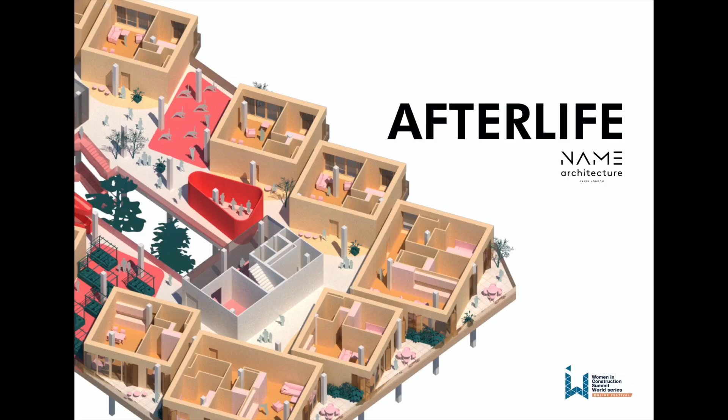Afterlife is a design concept that proposes to retain rather than demolish existing structures and retrofit them to achieve enhanced environmental and social facilities. According to statistics, the average lifespan of a building in Britain is 132 years. However, in the commercial sector, the average lifespan is only 25 to 30 years.

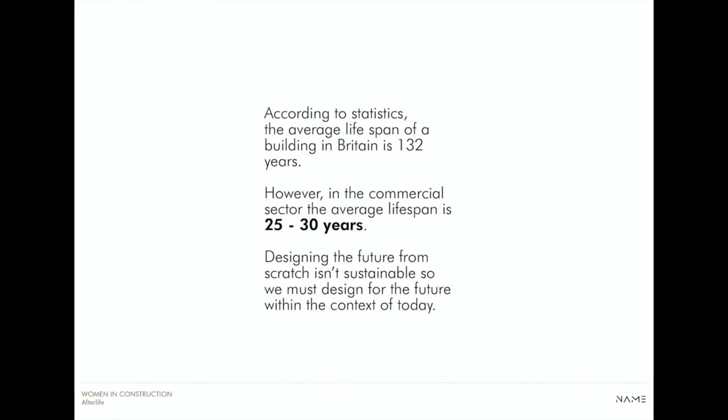So designing the future from scratch isn't really sustainable. We must design for the future within the context of today. And as we know today, the greenest building is the one that already exists. But this is not yet a standard in our industry.

The UK construction and demolition sector currently produces 120 million tons of waste each year. This is nearly 60% of all UK waste. On average, 95% of this can be recycled, and we know that reuse of materials lowers carbon emissions and utilizes their functionality. The photo on this slide is quite emblematic.

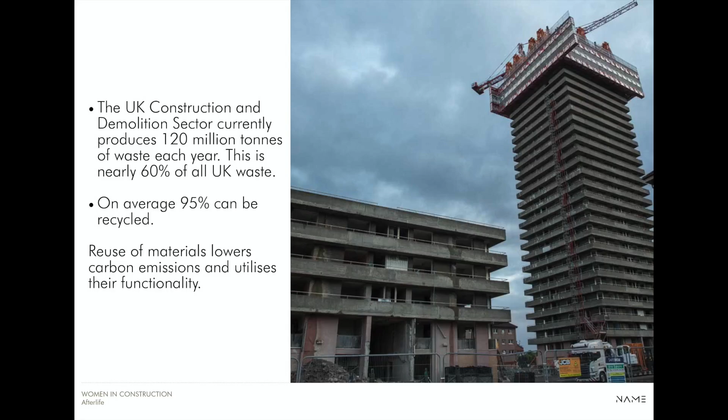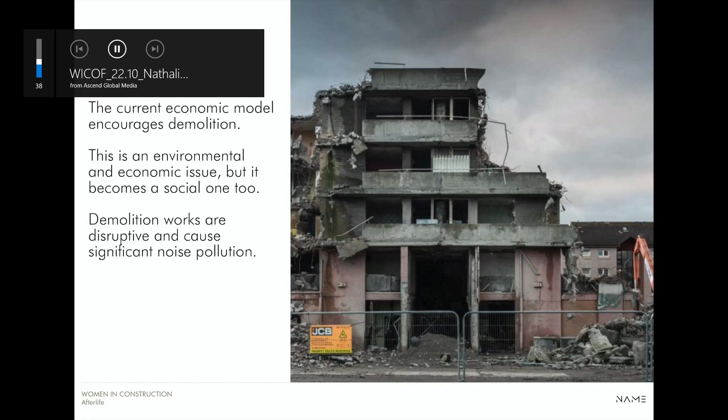On the left, a building being demolished, while on the right, a new structure is coming up. The current economic model actually encourages demolition. This is an environmental and economic issue, but it becomes a social one too. Demolition works are disruptive and cause significant noise and pollution. Here on this slide, we see the building from the previous image, which was now demolished.

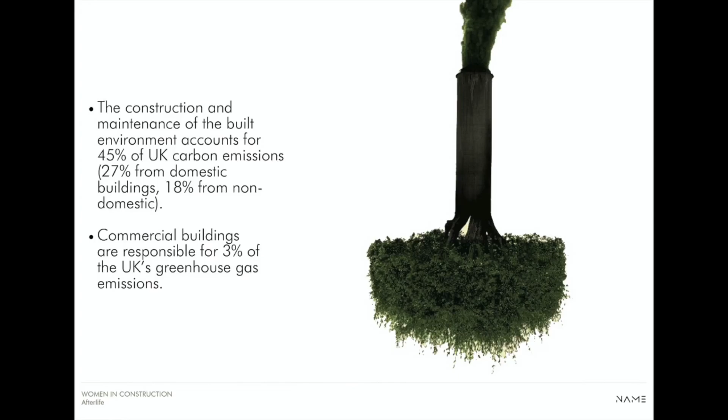So what about our existing built environment? The construction and maintenance of the built environment accounts for about 45% of UK carbon emissions, and commercial buildings are responsible for 3% of the UK's greenhouse gas emissions.

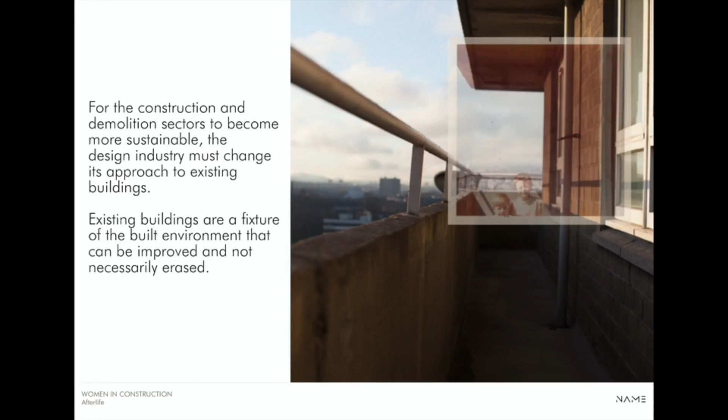For the construction and demolition sectors to become more sustainable, the design industry must change its approach to existing buildings. Existing buildings are a fixture of the built environment that can be improved and not necessarily erased. As we have long experienced in our practice, the purpose of a building can be altered, and the environmental performance of a building can be improved.

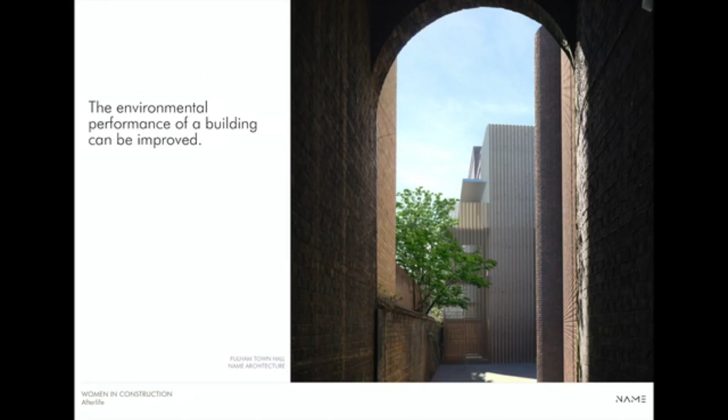So we ask a question: how much demolition could be avoided with a thoughtful architectural strategy? How can retrofitting become more of the norm?

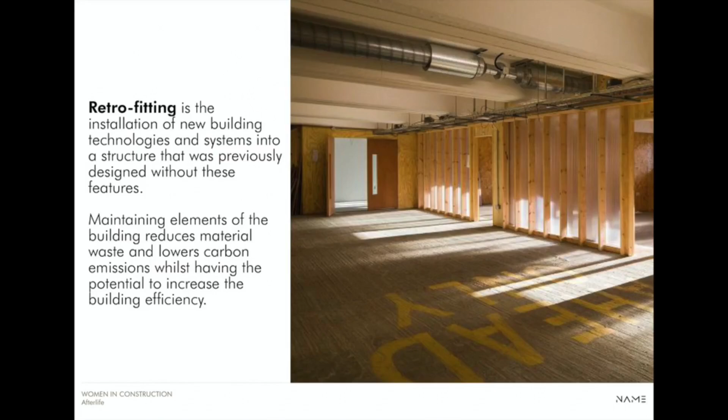The notion of retrofitting is not a new one. It considers the installation of new building technologies and systems into a structure that was previously designed without these features. Maintaining elements of the building reduces material waste and lowers carbon emissions, whilst having the potential to increase the building efficiency. However, this is still carried out in rather established construction methods today.

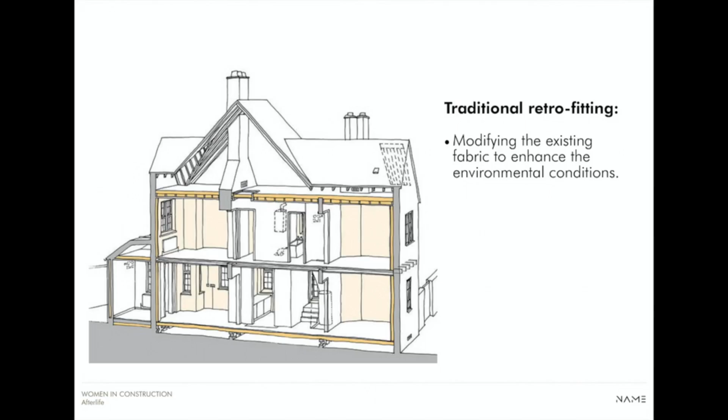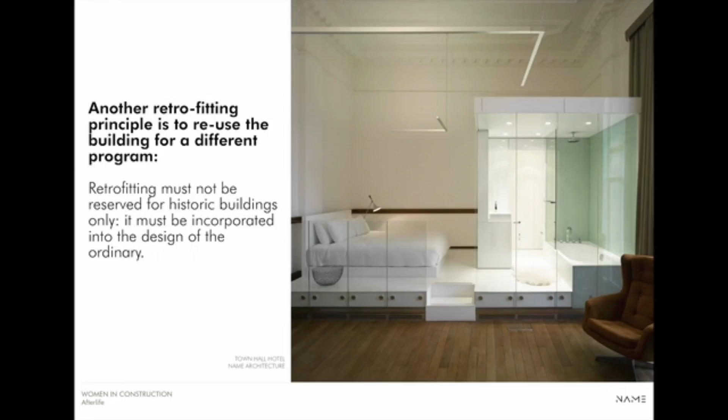Another aspect of traditional retrofitting is to modify the existing fabric to enhance the environmental conditions, mainly by adding insulation internally. A further retrofit principle is to reuse the building for a different program. Converting listed buildings is something we deal with a lot in our practice. However, retrofitting must not be reserved for historic buildings only. It must be incorporated into the design of the ordinary.

What we are proposing here is a novel way to consider retrofitting, by harnessing the interstitial space, in other words, the leftover space. Stemming from the observation that typical dimensions, for example floor-to-ceiling heights, of commercial buildings compared to those of residential buildings result in a surplus for the latter, we examined whether this surplus space could be used to enhance environmental and living conditions.

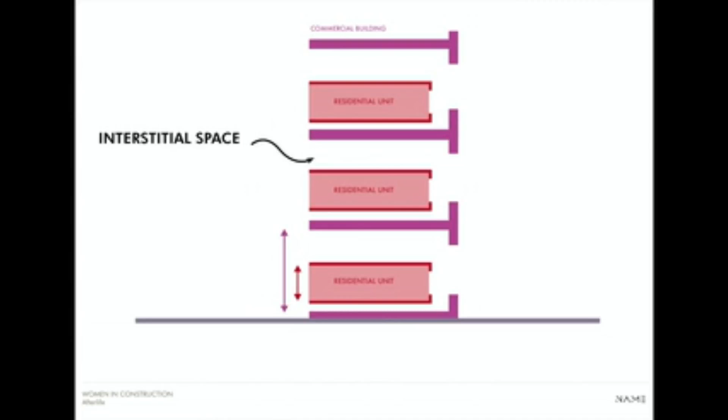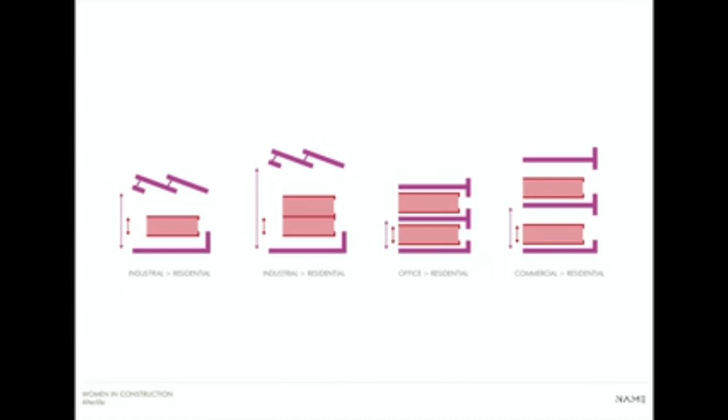Residential floor-to-floor story heights are typically lower than those of non-residential uses. Can we thus use this interstitial space surplus to improve environmental conditions within existing structures retrofitted for residential use, and enhance the quality of living?

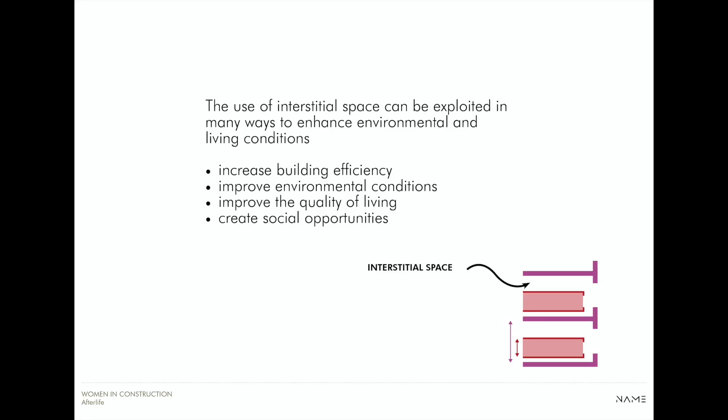This was the foundation of our thoughts and the outset of our design proposal, which concentrates on the potential of existing buildings to be reused. The use of interstitial space can be exploited in many ways to enhance environmental and living conditions. It can increase building efficiency, improve environmental conditions, improve the quality of living, and create social opportunities.

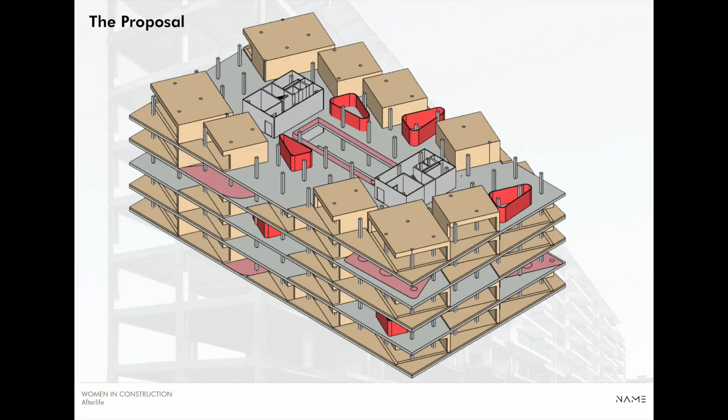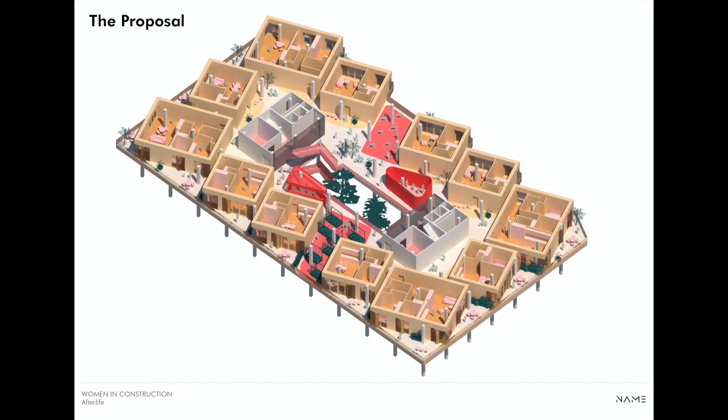Afterlife is a design concept that works with existing structures and retrofits them for new, greener uses with prefabricated dwelling units and communal amenities. We propose to design housing units to inhabit the periphery of the slab, with the core area dedicated to adaptable communal amenities around a central atrium.

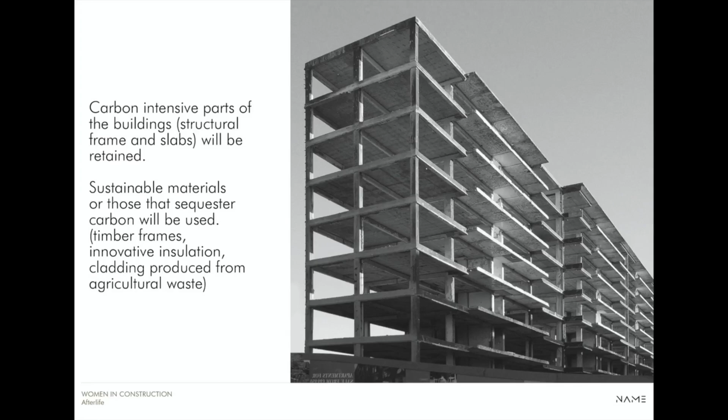The carbon-intensive parts of the building, the structural frame and slabs, will be retained. Sustainable materials will be used for the new insertions: timber frames or innovative insulation and cladding produced from agricultural waste.

So how do we do this? First, we strip out the existing building back to its structure. We keep the core and create a central atrium to vertically and visually connect communities. We also update circulation cores to ensure they meet current regulations.

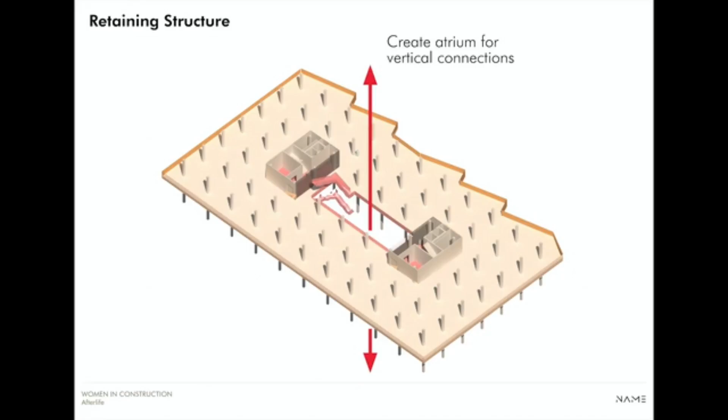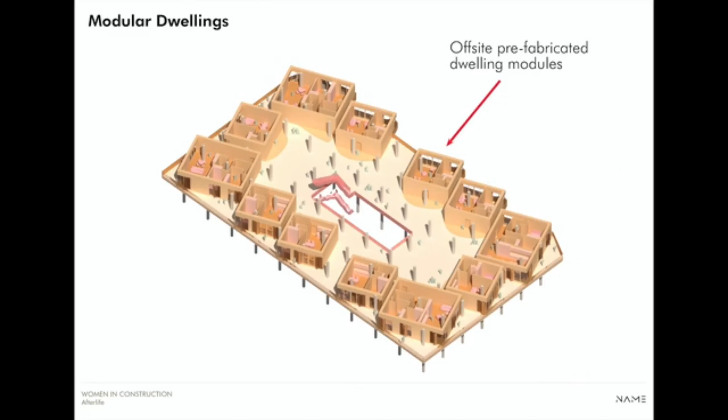We then analyze the building's orientation and prevailing wind conditions, and the off-site prefabricated dwelling modules are placed on the slab around its periphery accordingly. We exploit the surplus space to rotate dwelling units into the most favorable orientation.

We strongly believe that three key features embody the basics of good quality housing. First of all, dual light exposure, to ensure a quality of natural daylight throughout various moments of the day and an outlook on a variety of exteriors with enhanced views.

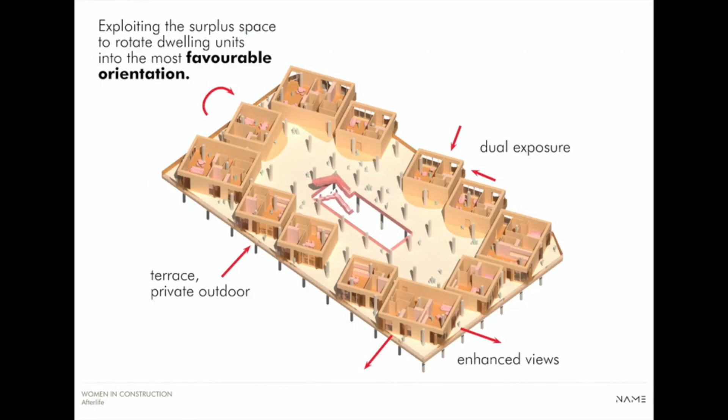Second, private outdoor space, and the provision of a balcony to enable access to outdoor space. And third, natural cross-ventilation, to provide healthy airing of the internal spaces and assist cooling.

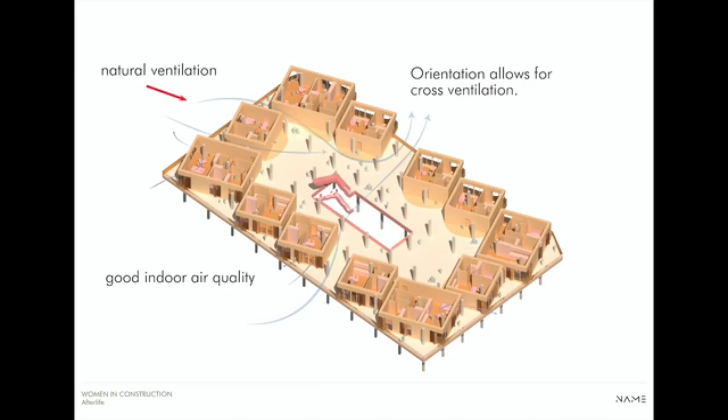The orientation and spacing of the units allows for cross-ventilation and good air quality throughout the slab, both for private indoor spaces as well as for the external communal facilities.

The interstitial space is also used to integrate smart living features to enhance energy-efficient consumption and comfort control. Insulation is inserted in the gaps between the existing structure and the new inserted units, and more generally, utility rooms are located in the surplus space between dwelling units.

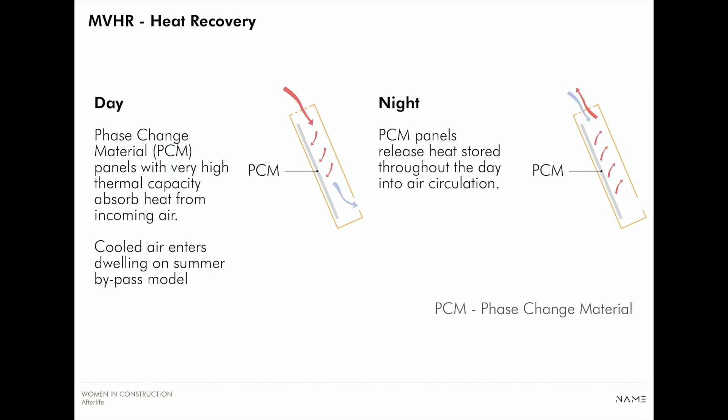One example is the insertion of heat recovery units between modules. We insert phase-changing systems in the interstitial space, allowing for panels with very high thermal capacity to absorb heat from incoming air, and as such, have cooled air entering dwellings in summer. PCM panels then release heat stored throughout the day into air circulation at night.

Another smart living feature is the communal air source heat pump system, which is used for communal heating and water throughout the slab, as well as extensive PVs on the roof level. Throughout the scheme, we aim for passive house standards of the building fabric and the use of biomaterials for health and well-being.

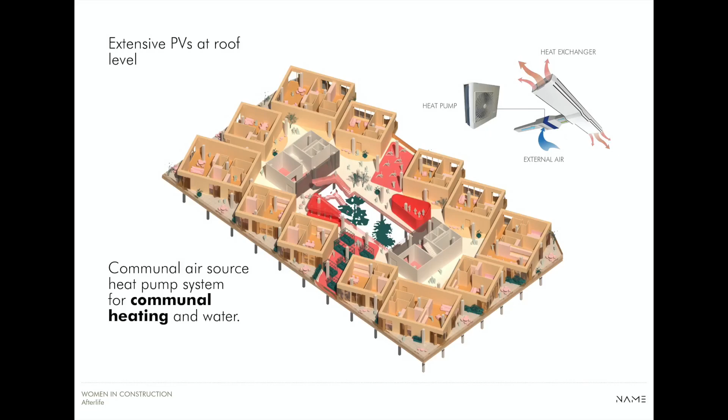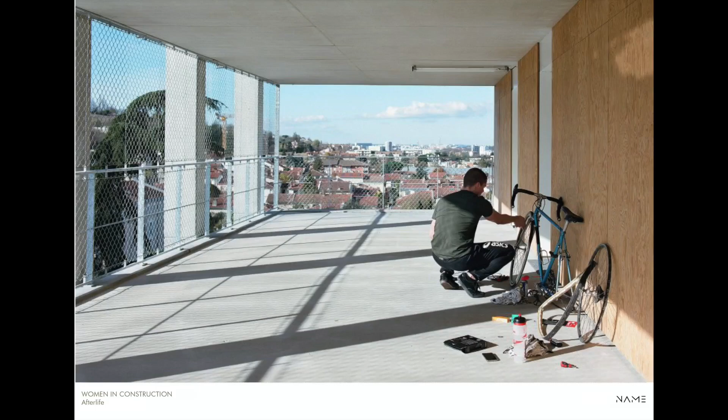The exterior private space created through the rotation of each unit provides a generous, well-designed private outdoor space, as well as shading for the balconies on the south and west facades, thus avoiding overheating risk. This is an example of what a private outdoor area at a taller vantage point over the city could provide.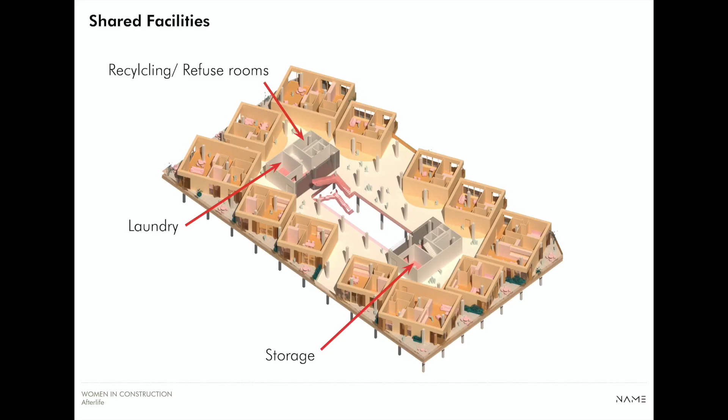The original cores of the building are then reconfigured into shared facilities. These become refuse and recycling rooms, or communal laundry spaces, storage rooms, basically facilities that benefit everyone and enable more space to be dedicated to the dwelling units.

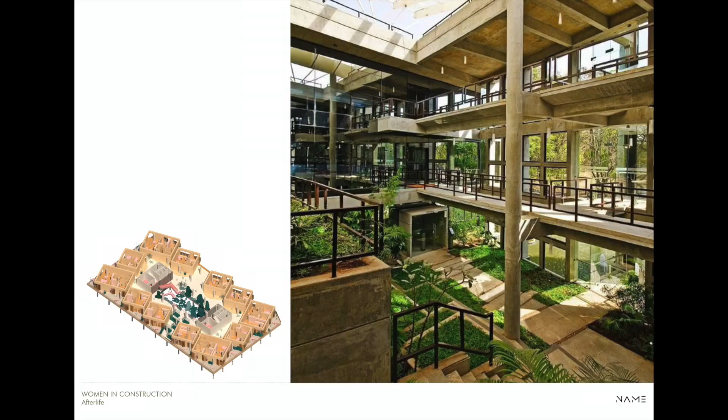Vegetation is generously inserted through an approach to biophilic design. We have communal landscape planting and gardens that provide food growing opportunities. Greenery on all floors is visible through the atrium and contributes to providing a quality of space.

The core area around the central atrium is dedicated to adaptable communal amenities. These provide shared facilities and enhance social connections. They offer a variety of amenities, both indoor and outdoor, that residents will benefit from.

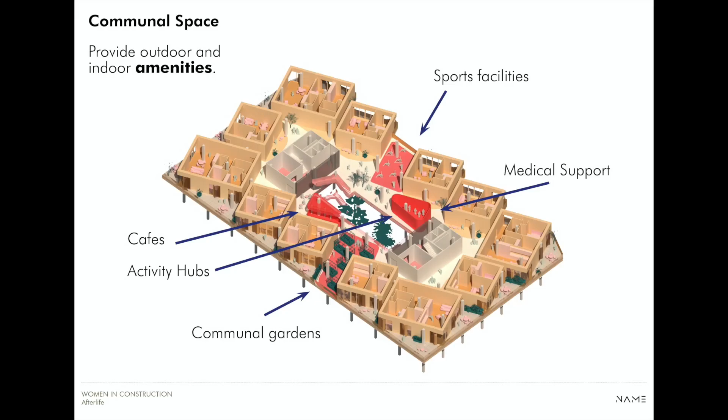The communal amenities are devised as flexible spaces, which can be accommodated at different locations on the various floors to offer a wide variety of uses for the community. These could range from wellness, such as fitness rooms, clinics, beauty salons, or a medical support unit, for example, for elderly living. There will also be living amenities such as cafe, communal lounge, or game rooms, or learning amenities for art activities and workshops.

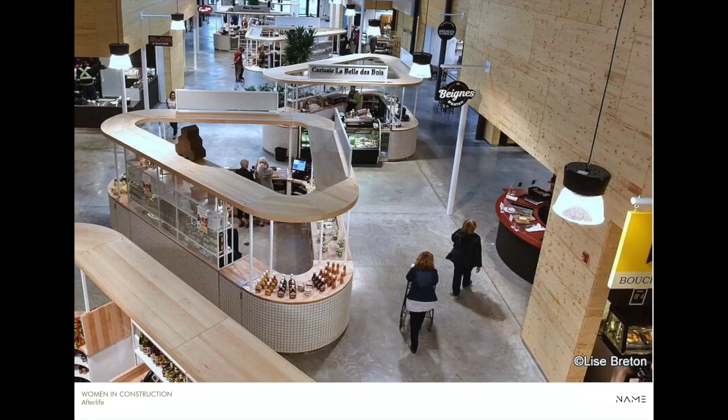The residents will thus benefit from a sense of place and community in the building. We also provide an outdoor open space for playgrounds or sport activities, for example. All these social pods are modular and designed to adapt to a multitude of activities and sizes. The communal areas are a space for encounter and exchange for an active lifestyle.

Beyond purely environmental aspects, this is also a way for us to use this interstitial space for better living conditions. Our thinking to create a more sustainable product also considers the technologies required to achieve this.

The proposal is put together with alternative construction methods and prefabrication. This allows for time and cost efficiency, an increase in quality as each component is created in a controlled environment, and the site is kept clean and organized, thus reducing waste.

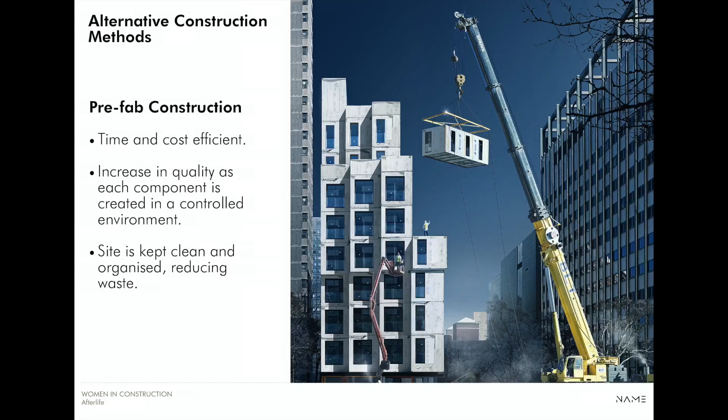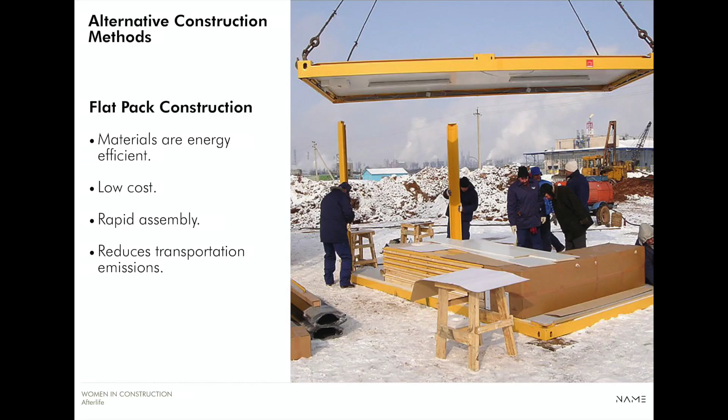The modular units arrive as flat pack elements. They are assembled with materials that are energy efficient at a low cost thanks to rapid assembly. And it also reduces transportation emissions, further improving the sustainable outcome.

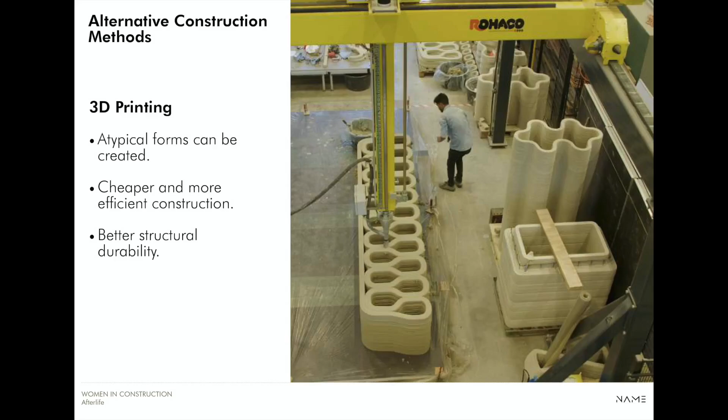In the future, we could also consider on-site 3D printing for creating atypical forms, or possibly a cheaper and more efficient construction and better structural durability.

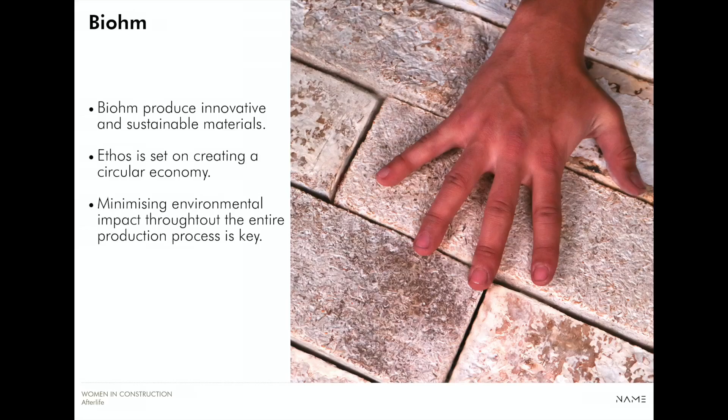To develop our material choices, we worked closely with Biohm. Biohm is a leading pioneer in the research of bio-based materials. Their ethos is set on creating a circular economy and minimizing environmental impact throughout the entire production process.

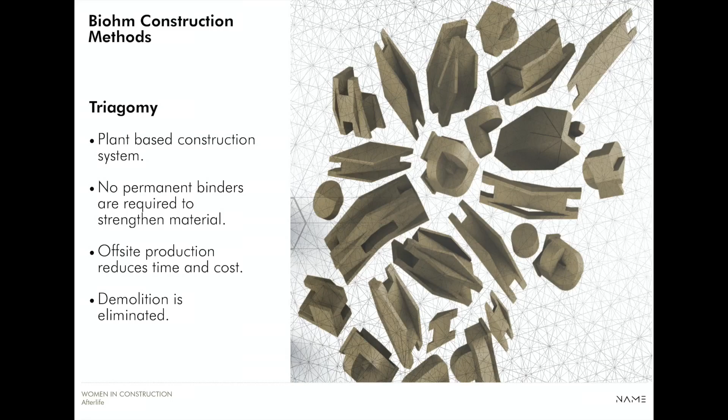They have developed a plant-based construction system from which the modular units could be built. This is a system where no permanent binders are required to strengthen material. This means off-site production is possible, reducing time and cost, and also that demolition as we know it is eliminated, as the components can be dismantled and reused differently somewhere else.

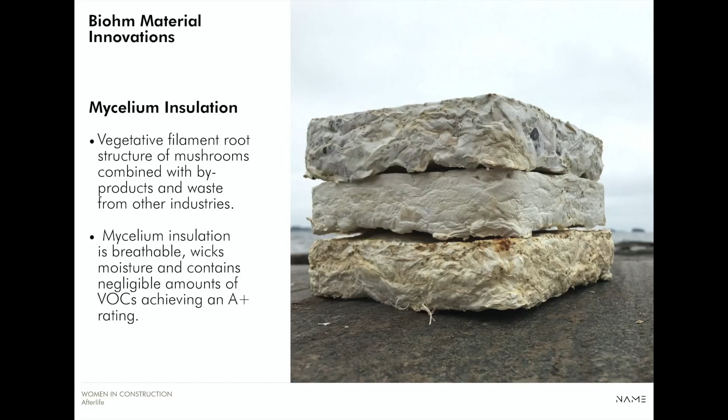The units are insulated with mycelium insulation, a vegetative filament root structure of mushrooms combined with byproducts and waste from other industries, which provide high standards of insulation from 100% natural and biodegradable material.

Surfaces are made of Orb, food waste converted into a sustainable and aesthetically beautiful replacement of wood-based sheet materials. Again, this is 100% biodegradable, sustainable, and renewable.

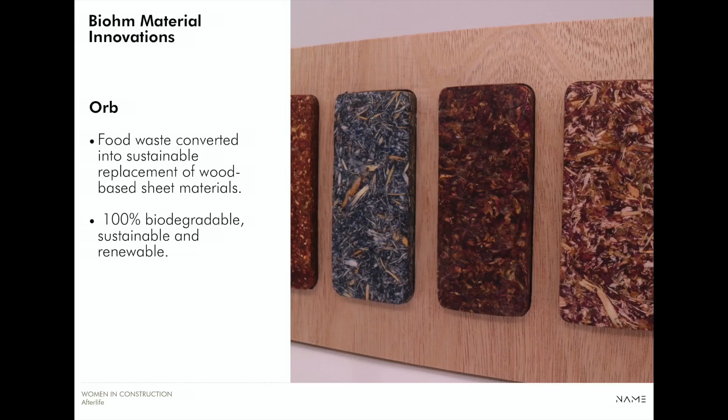Working closely with our environmental consultants XCO2, we aspire to achieve a proposal which is net zero or even carbon positive over its lifetime. The most carbon-intensive part of the existing building, its structural frame and slabs, will be retained, and all new inserts proposed in natural and innovative biomaterials, which will drastically reduce the embodied carbon content and construction site impacts of the homes.

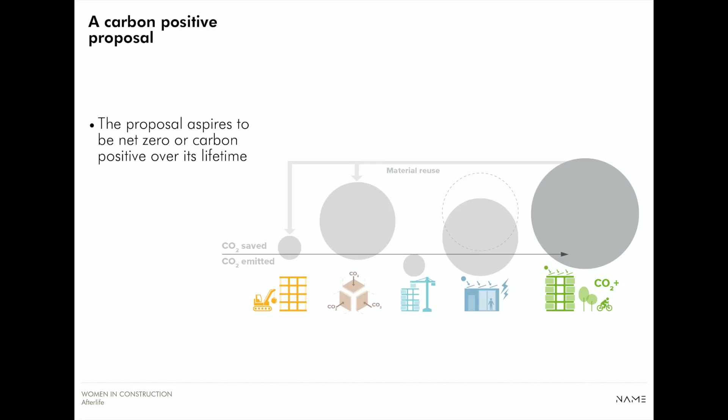Moreover, all construction elements will be modulated and designed to enable disassembly and repurposing at the end of the building lifetime. But Afterlife also considers the much longer-term potential of our built environment and embraces the reality of changing societal needs. The insertions can be fully dismantled, components recycled for new uses, and the original structure populated by new programs and functions over time.

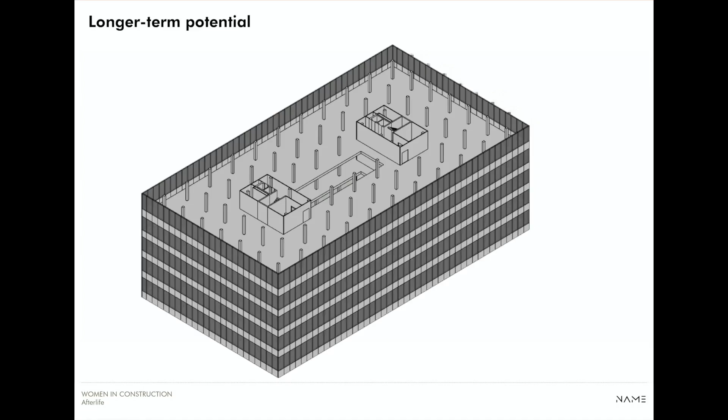We can imagine what homes we want in 20 years' time, but as recent events have shown us, projections change and are not always predictable. As such, the concept is designed to allow for change to be implemented in the future as our society evolves.

Our aim with Afterlife is to show that if we can retain more existing structures through intelligent retrofit, we'll reduce carbon emissions and embodied energy costs, while improving the quality of our living conditions. We'll help conserve resources and set buildings up for a much longer life.

I am convinced that there is a financial value of buildings that promote well-being, and that this will be an increasing demand from both investors and dwellers from now on. Afterlife is a cost-effective solution to respond to future housing needs and requirements.

I hope this talk provided you with a new outlook on the retrofitting of existing structures, with novel proposals for increased environmental efficiency, and with an understanding of how we can embed flexibility of use for evolving societal needs with good design. I am eager to hear your impressions and feedback in the time we have left for the Q&A.